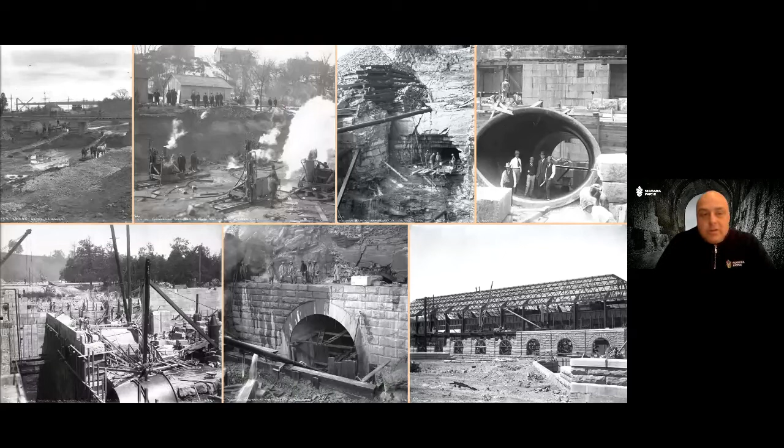So here's some amazing photos from the archives of when the power plant was built on the Canadian side. So you can see, working top left to right, where they're digging, getting ready to create the forebay, which would house all the water, the type of equipment that they used, steam powered, a lot of leverage, a lot of mechanical engineering. In the third photo, the steel structures, massive steel structures that were built. You can see the people standing in them and how large they are, and the construction and manufacturing behind it.

And then on the bottom 3 photos, you can see more of the build of the plant. The middle photo is actually the portal where the water would exit after it was used in the power plant. And to the right, you can see the facility that was created by basically steel and masonry efforts.

So a little bit about the chronology on the Canadian side. The doors opened in 1905. Power was generated by July of that year. So Canadian Niagara Power, when it began generating electricity from the Rankine station, it became the first hydroelectric generating station to be built on the Canadian side of the river and to transmit power for multiple miles.

So William Birch Rankine did pass away 3 days after the station opened. So unfortunately he never even got to see the power being created in the plant and transmitted the distances. But later on, they do rename the facility or put a plaque on the facility to give him tribute.

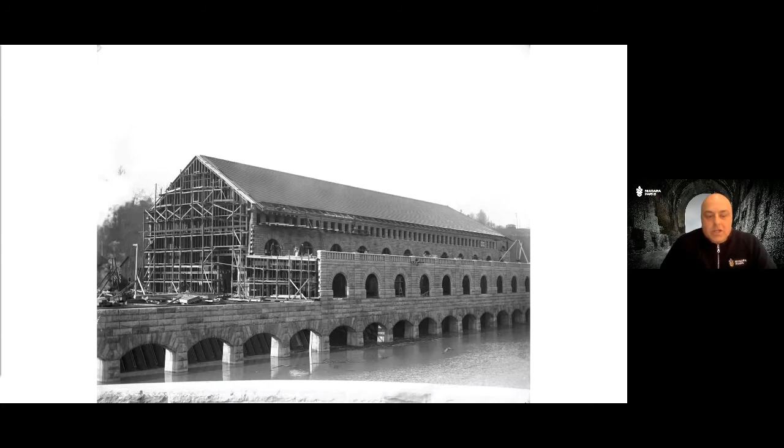So here's a photo, and the reason we put this photo up is I want you to look at the arches at the bottom of the photo. That is the beginning of the process as the water is directed into the facility. And you can see behind it some steel structures, which we call the trash racks.

So just a couple other key dates. It took until 1924 to get the 11th and final generator into the building. As I mentioned, in '27, the plaque is added to honor William B. Rankine. In '28, basically Canadian Niagara Power opens up in Fort Erie.

By 1950, Niagara Mohawk Power acquires the station. 2002, Fortis. Eventually, the facility shut down in '06. And in '09, Niagara Parks takes over and starts to put visioning exercises together to try to protect and preserve the plant and hopefully bring it to everyone who'd like to come see it as a brand new attraction.

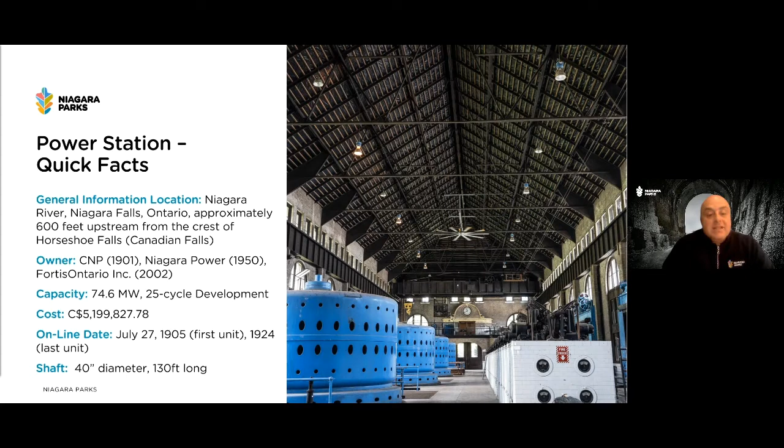At that time, it cost almost $5.2 million Canadian to build it. And an interesting fact about that, today that would be over $150 million, so you can see the present value of those dollars. The online date we talked about was July 27th, 1905, and by 1924, the last unit. And we'll start to go through a little bit of the equipment, so we'll go to the next slide.

You've got the penstock that we're going to show you and what it looks like, the power station, local limestone, glazed clay tile roof, very beautiful. It's 570 feet long, 2 floors. This wheel pit, I'm very excited to show you because it's one of the coolest experiences. It's at the very bottom of the plant. It's very long, the entire length of the plant, and it's about 20.5 feet wide.

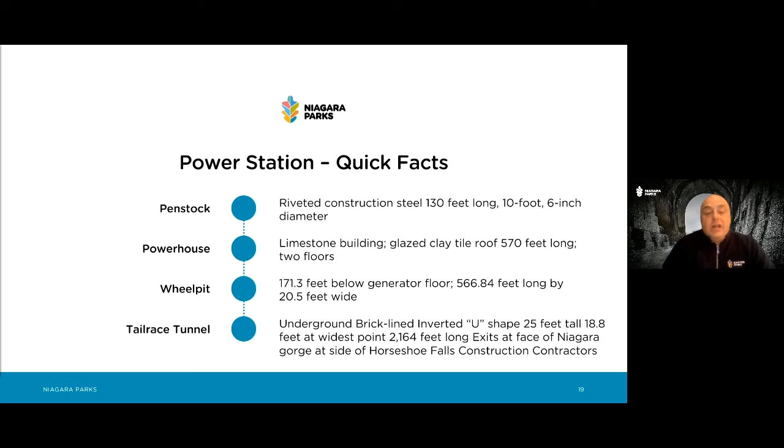And then of course that tunnel, where we'll show you that as the water came in, it headed back out the tail race tunnel and back to the river. So very green, very ingenious. We'll move on to the next slide.

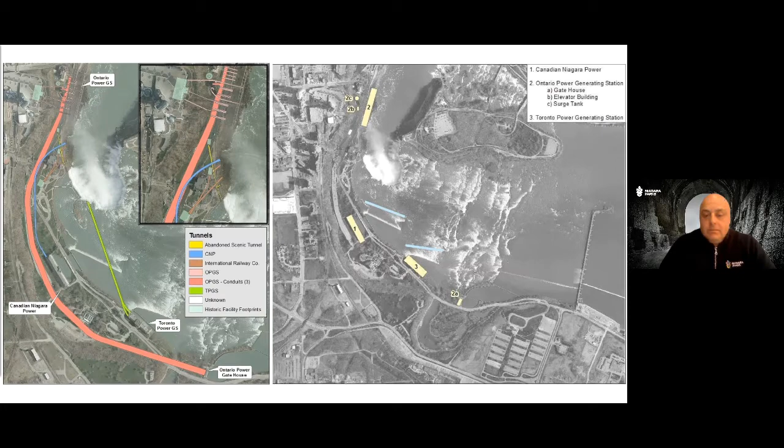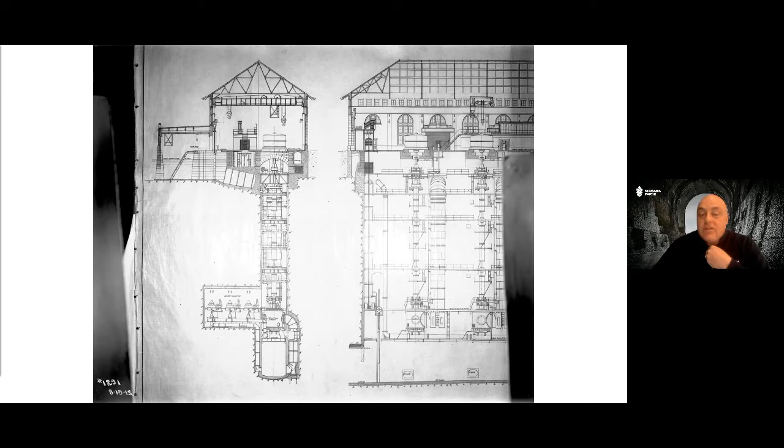You've seen this photo in the video, but here's a cross section of how the plant works. We're going to do a little video that gives a clear indication coming up. On this one, you can see the flow coming in through the forebay, through what we'll teach you about — the headgate, penstock — down the multiple layers to the turbine, and eventually down to the very bottom rectangular area known as the wheel pit. To the right, you can see the wheel pit leads to the tunnel I showed you, which leads back to the river.

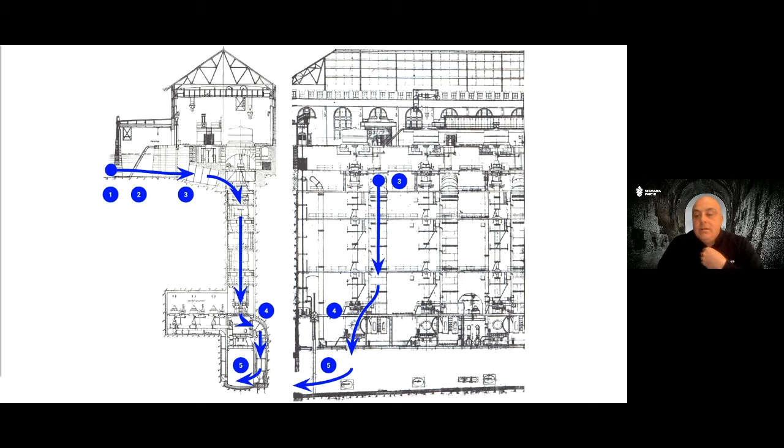Here's a quick little video to show you the function, and then I'll be able to show you the equipment and how it functions. Hopefully you'll be able to see this shortly, and if not, I can walk you through it.

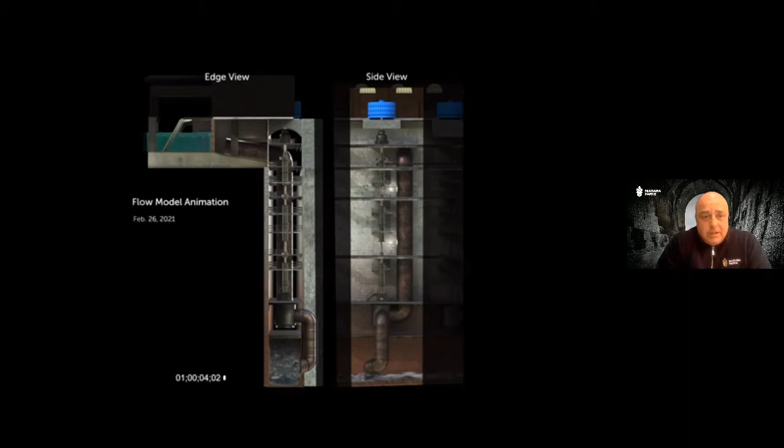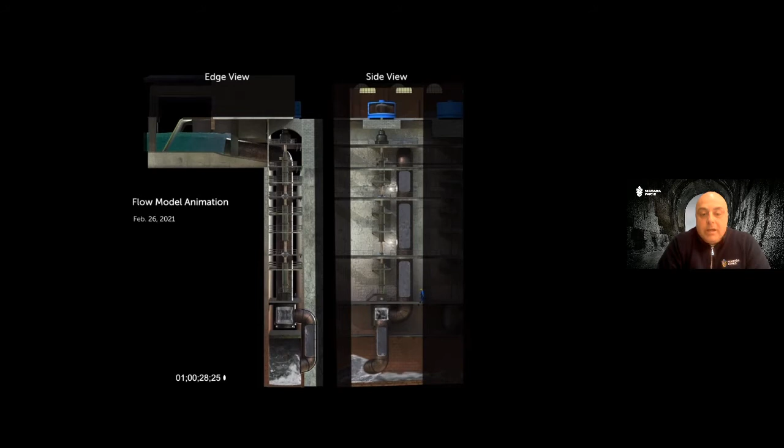You see the water on the top left, a little greenish in color, a lot of lime and calcium. You can see the gate coming up and the water starting to make its way through the trash racks into the penstock. As you go down the penstock, you'll start to see near the bottom the turbine begin to turn, then through the turbine into the wall and back out to the wheel pit, and from the wheel pit down this beautiful brick-lined tunnel. These floors are massive — you can see by the person on the right cross-section the comparison of an average person to how large this infrastructure is. So we're going to show you that.

At the very bottom, the turbine is connected to the shaft. The shaft goes up to the blue alternator — a lot of people call it a generator, but I will call it an alternator, which spins and creates the AC power.

So we'll move on and show you a little bit more around the equipment. I talked about a head gate. Once you come into the forebay with water, you make it through the trash racks, these massive steel structures that they figured out the engineering to lift up and down as required. We wanted you to have a visual of that. These are about 19 feet by 17 feet.

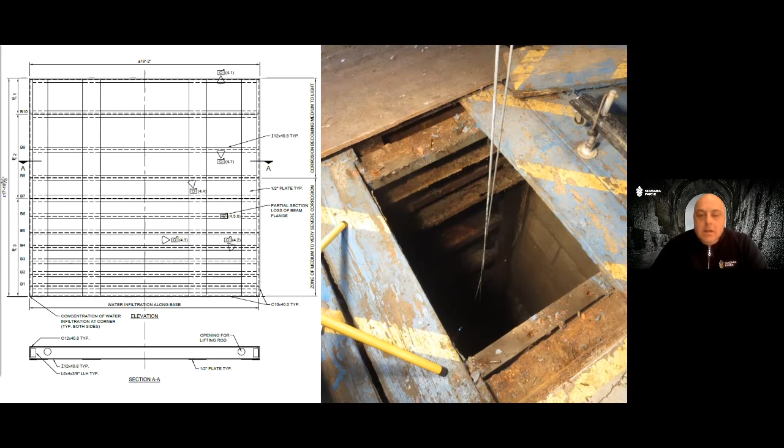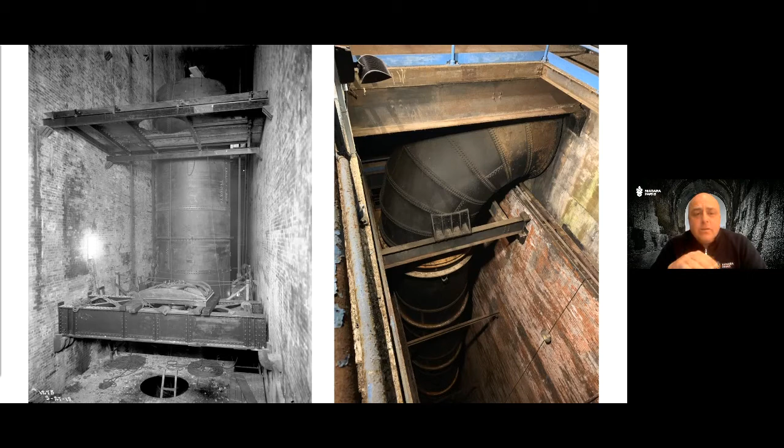After the water comes in, the first thing it hits on the right-hand side is the curved section of the penstock. These are 10 feet 6 inches in diameter, riveted steel structures. I don't know how they did it back then, but they figured it out. A massive structure that they pieced together like a puzzle, taking it all the way down 135 feet until it hits the turbine. On the left, you can see how they were putting it in section by section with limited equipment.

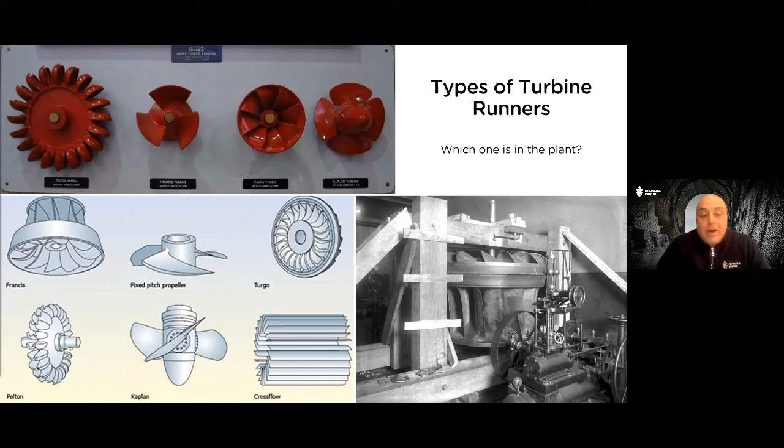Another interesting point is the selection of turbine. We know there are a lot of different kinds of turbine runners out there. To the right, you can see it cribbed up as it arrives at the plant to be installed, and you can compare that to the photos on the left. You can see they used a Francis turbine, named after the individual who invented it.

What's very interesting about the Francis turbine is it's got a double set of blades. It's even used today in hydropower plants. It's based on Newton's third law - any action gets a reaction - so it's a reaction turbine. The resulting motion, even though the water's coming in horizontally, ends up as an axial transfer of load, which is perpendicular, and then the water drops down, the shaft spins, and does what we showed you.

It's very efficient, anywhere between 90 and 95% efficient. The key is that it can stay at a constant speed as long as you can adjust the water, and we will show you how that is done in the plant. It's also ingenious in that you can keep the speed and direction, and it can be flipped - in this plant, it was just positioned in this fashion. So we wanted to explain that.

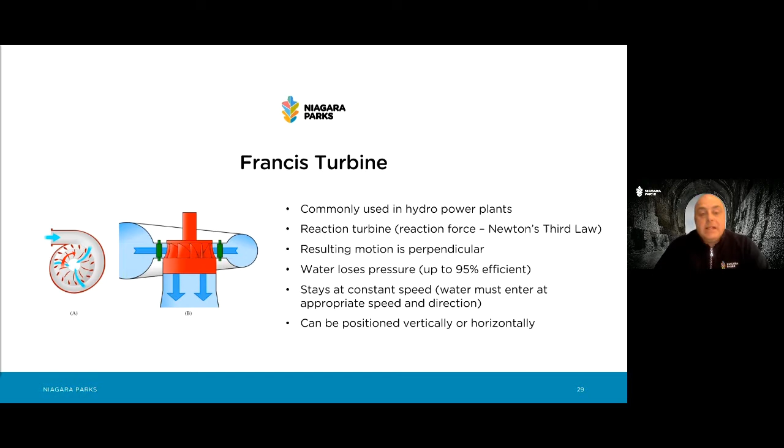This shows you that as they're putting in the turbines, the 11 of them, improvements are made and different companies are manufacturing it. Some names you'd recognize today, like Bethlehem Steel, Escher Wyss out of Switzerland, and Wellman Seaver Morgan. You can see the horsepower grows as they're tweaking their design, but what always remains constant, because they picked the Francis design of turbine, is that 250 RPM.

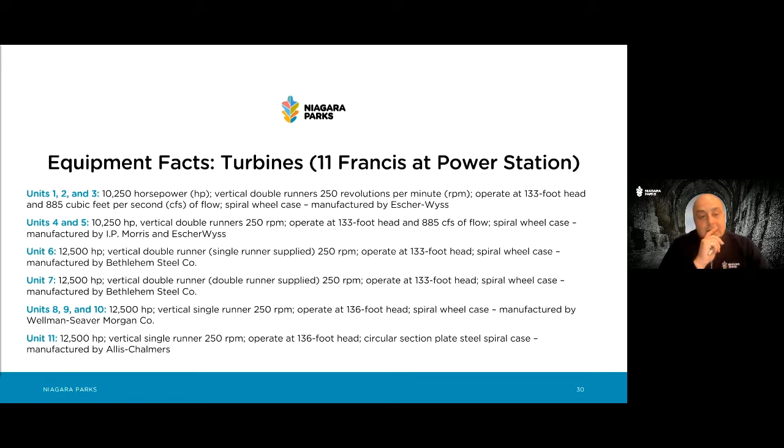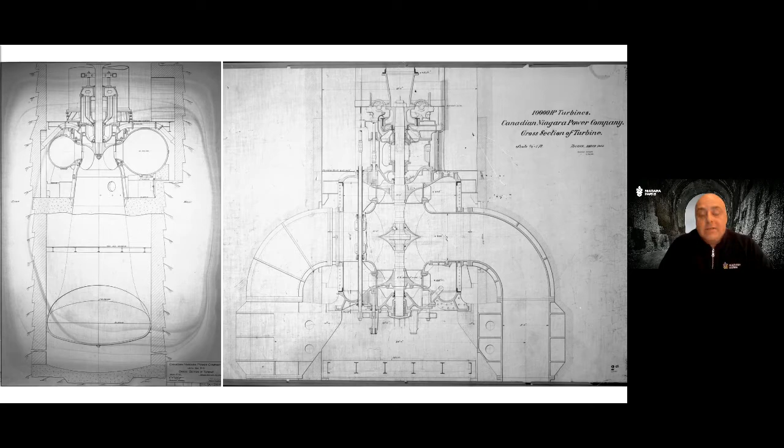Next, some really cool equipment that's down in the lower areas of the plant. This is basically a pump, a massive pump system, so that as the water came in, they were able to pump it through the entire plant for cooling purposes and to use it throughout the plant for many functions.

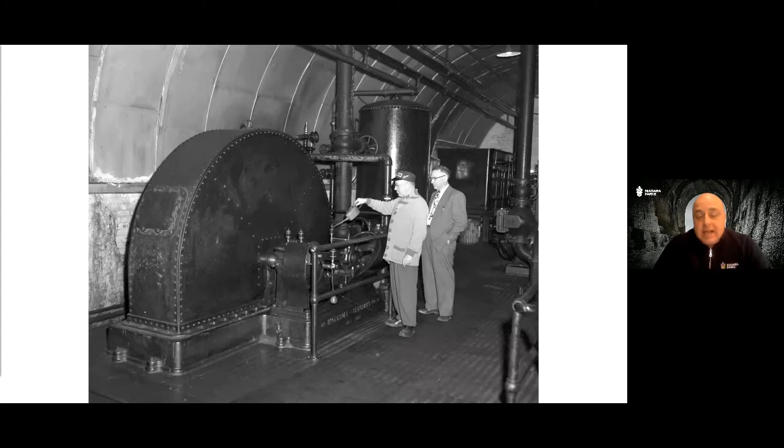Another cool piece of equipment on the next slide is an air compressor. I don't know if it's one of the first air compressors made, but again, always using water to turn these different devices or inventions, they were able to create compressed air and use it throughout the facility for different purposes. Some incredible equipment.

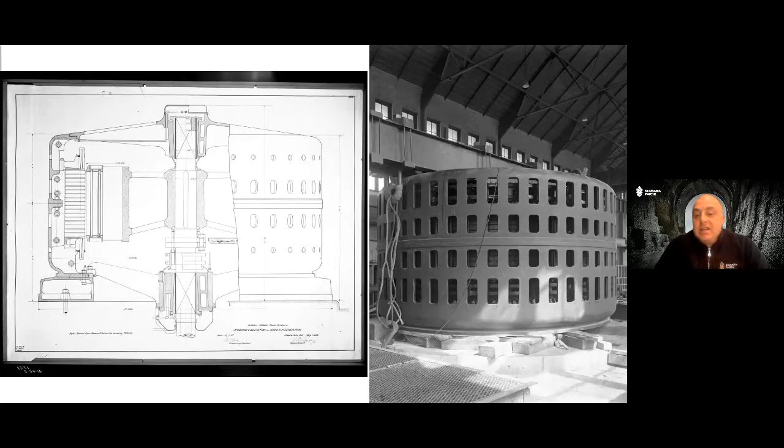Just wanted to give you a visual of the alternators that are still in the plant and a cross section so you could see the rotor, just the basic principles of a motor, and we'll really get into how these create the AC power and Tesla's ingenious invention.

I just threw this up for people that are interested, but they had already made a decision on the Francis turbine, and the fact that it's already a set size and diameter and speed, and they had a fixed head, the difference between where the water comes in and when the water hits that turbine, meant they were really kind of stuck with going ahead with 25 hertz power.

You can see as it lines up, at 25 hertz you're at 250 RPMs. If you scroll to the left, that means they had to put 12 poles inside the alternator, so they were kind of stuck. The decision had already been made in the Dean Adams plant, they already selected the turbine, it was on order. That fixed them into continuing with 25 hertz and not switching to something like 60 hertz, which later on in the plant was a bit of its demise. The conversion to 60 hertz would have cost too much, and there were other issues as well.

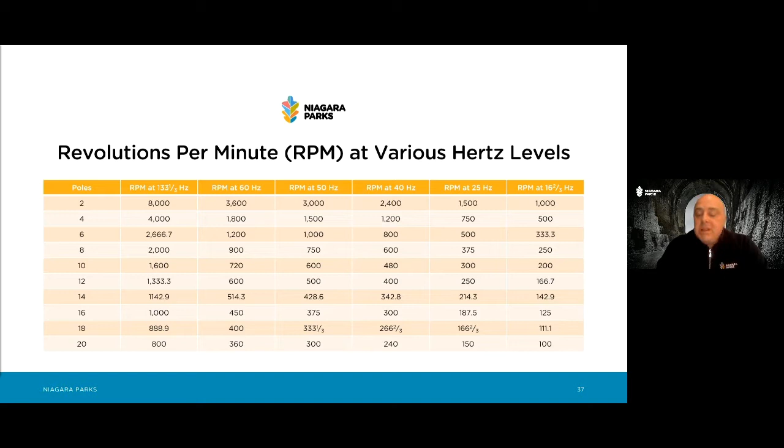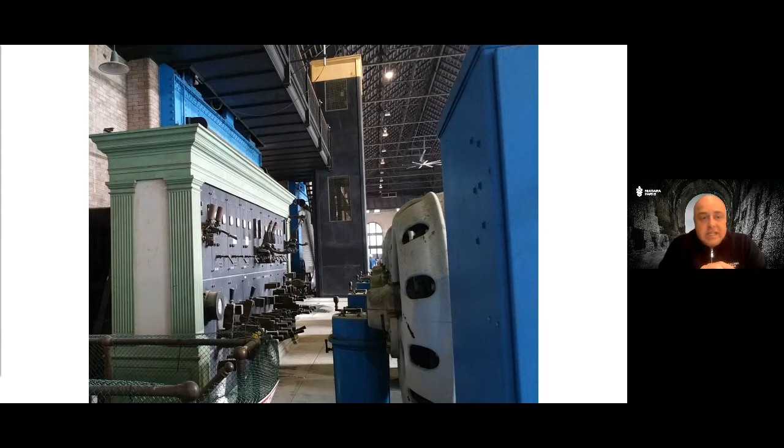Okay, so this is an important part where we learn about the DC. There's a little bit of Edison in the plant because he came up with DC. This panel is a DC panel, and on your right I'm going to show you the exciter, which also generates DC. These switches powered up a DC elevator, the lights were DC, and several other things in the plant were DC. So we have a wonderful combination of DC power and AC power in the facility.

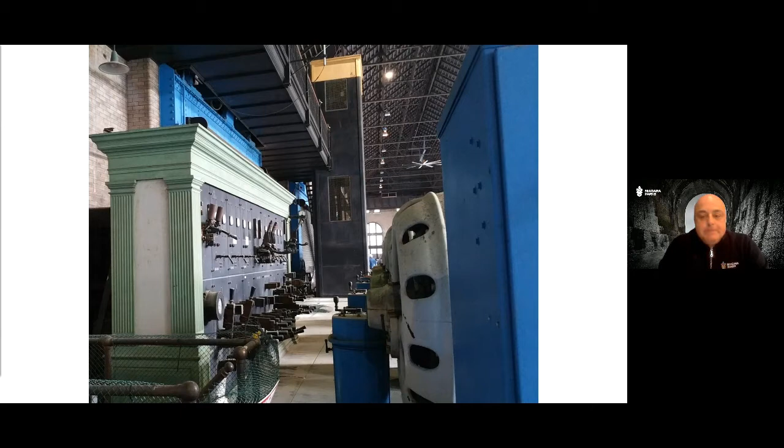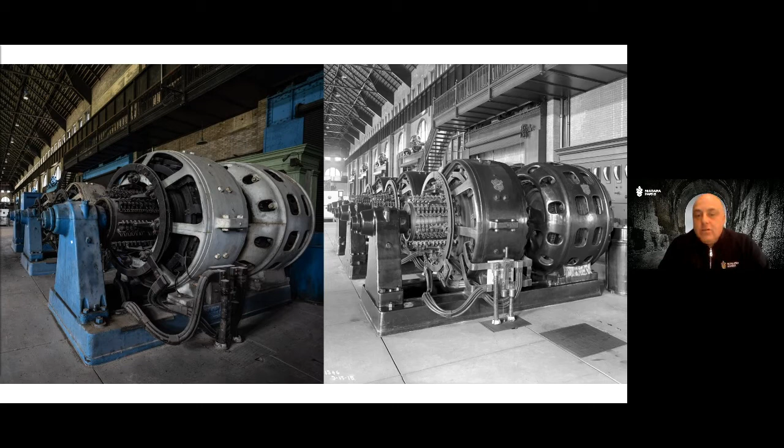So this is what I call an exciter. I've been corrected many times by people who know a lot more than I do, and they call it something a little different. But what I can explain is, if you look at the right when it was initially installed, you see two chambers or housings. The right is the motor, and the left is the generator. You needed the motor to start spinning, which at one point in time was done with water. So now you're turning an AC motor by Tesla, and then you're creating the generator. The generator is creating DC power.

The DC power goes into the alternator and creates the magnetism inside this alternator. So once you create the magnetism, now you have the complete package that Tesla came up with for generating AC power. The rotor spinning, the DC power is turned on through those exciters, and basically now you have the windings for the three AC lines to go through.

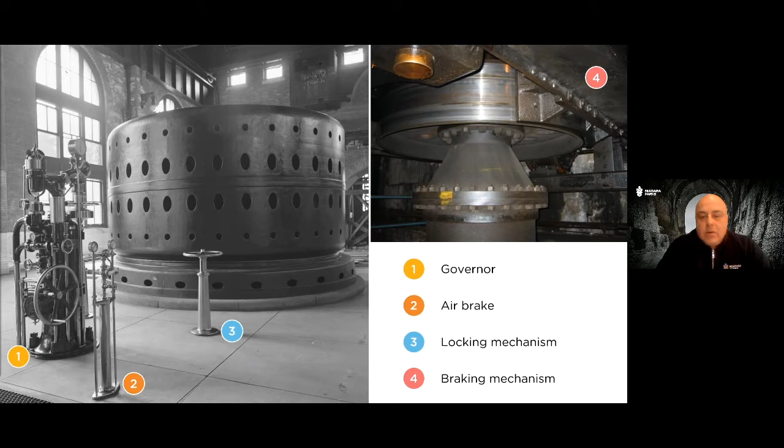So some really cool pieces of equipment. That governor is unbelievable to see in real life and understand how it functions.

They would watch the reactive VARs so they could know if it was lagging or leading the power. They could see the megawatts being produced by each generator as they turned on each one. And then they had to watch the current and the voltage because everything has to be in sync. And I'll explain that a little bit more.

So just a quick explanation of how that works, and maybe it's overly simplified, but this is how I think about it in my brain: when you're skipping and you've got two ropes going, those almost are creating the waves. We used to call it double dutch. I don't know what it's called today, but you're skipping. You have to be able to jump in at the perfect time. If you jump in at the wrong time, you hit the rope, it's done.

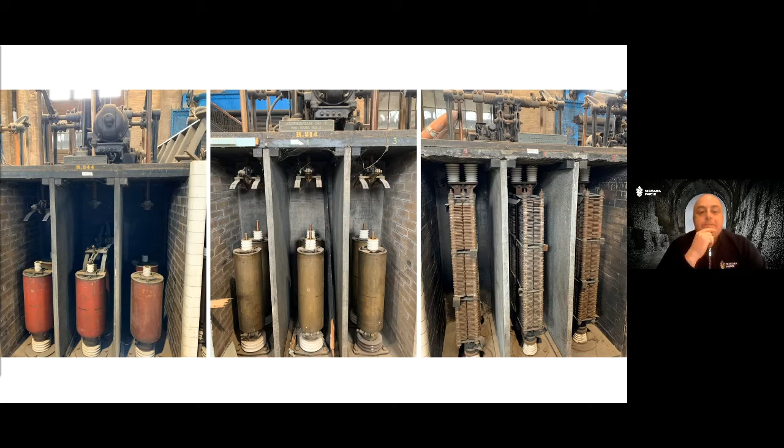So an interesting breaker setup between the operator on the second floor and the operator in the main control room that I showed you. They have to talk. They have to hit the switch. When the synchrometer hits 12, that tells them that's the right time. They're not going to blow anything up. Then these crack down, make the connection, and then we'll show you the synchrometer in the next slide. We'll flip to the next slide.

So once you close the switch in the middle, or your breaker, it has to flow. You can see the big copper bar right underneath. And to the left, those copper bars are in each of those phases. They're labeled phase 1, 2, and 3. That's called the bus bar.

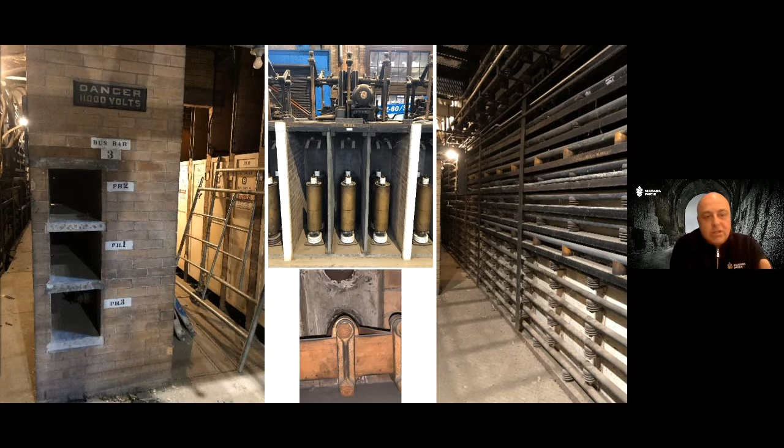So that takes that load, that electricity that's coming out of that alternator, the big blue machine, the breaker's closed, it flows through the copper cables, through each of those phases going through a long copper bar, and eventually to the right, go through the cables, and then the cables will take it out to where the power needs to go. So an understanding of the process. If we go to the next slide,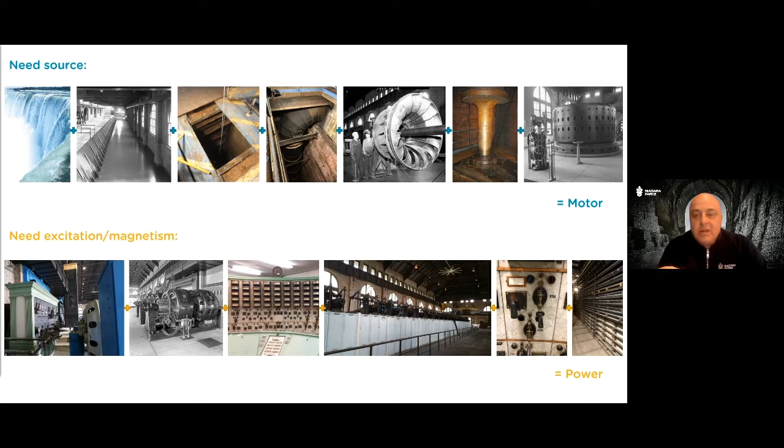In photo number 4, it drops 135 feet and spins the turbine, the Francis turbines. They're 130 feet down. Even though the water's coming in horizontal, it now turns the shaft perpendicular, which you see all the way back up, and is connected to that alternator, with that governor giving you the ability to get the speed and the amount of water just right to get it to 250 RPM. So now you flip to the excitation, because that's only a motor, basically. If you don't have magnetism, you just got a motor, you're not really going to generate AC current.

So when you come to the bottom, you've got this DC control panel, you've got the exciter that we talked about that spins the AC motor, goes over to the generator, generates the DC power, which feeds the big blue machine. You're in the control room, you're watching the synchroscope. When it strikes just before 12, somebody's talking to the operator on the second floor. You close the breaker. You've got the electrical panel. The way you close it is one of those switches, one of those knobs. And as I showed you, the power eventually goes out the cables.

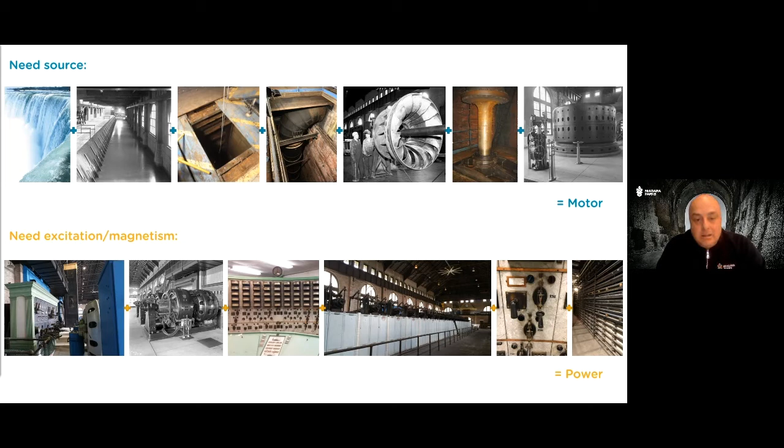And basically the last slide, you've got power for the lights in Fort Erie. So just an amazing process with amazing people. Tesla at the helm in terms of all his patents, 9 out of the 13 that actually make this plant work. And the beauty of it is we have it all in the plant that you can see, you can touch, you can understand. It's incredible for me as an engineer to be part of it, and hopefully it'll be incredible for you to come see it and experience it yourself as well.

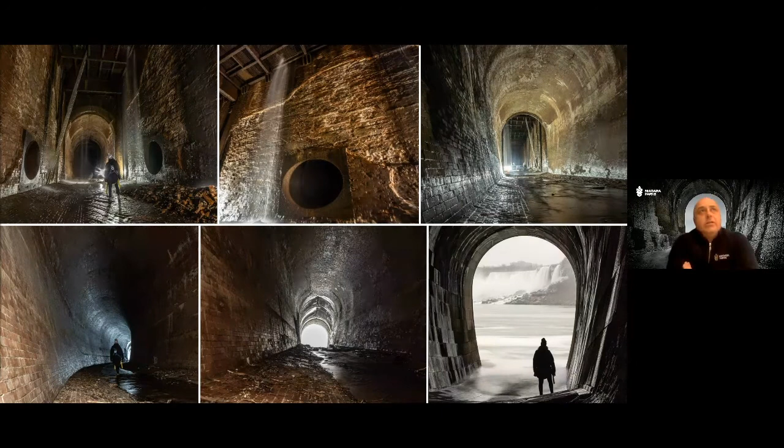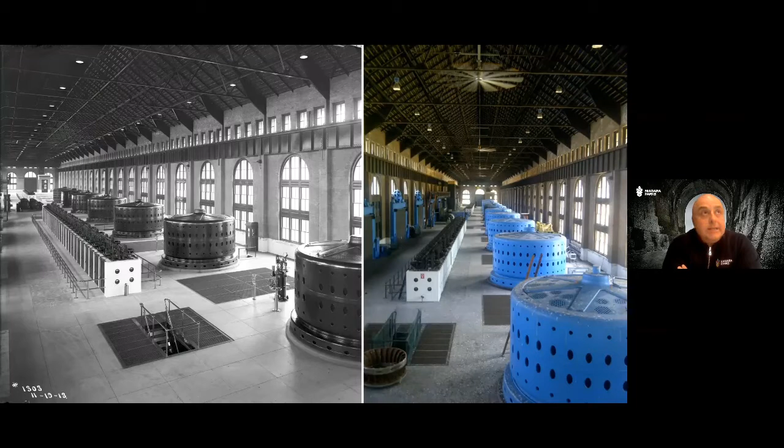So the tunnel is basically when the whole process is done, the water drops into the wheel pit, this big rectangular chamber, and then starts to head out 2,200 feet and make its way back and drop right into the river. Right by what you're looking at on the bottom right is the Horseshoe Falls, or the Canadian Falls. So you can't ask for greener than that. We borrow the water, we put it back, and power to everybody's home. And there's just a beautiful visual of the plant 115 or more years ago and the plant today.

I'm going to turn it back to my colleague Kim and let her take you through the reimagined power. Yeah, thank you, Marcelo. So what we'll do is we'll take you from the science and technology of hydrogeneration to how we're bringing this old plant to life. So we're taking it out of hibernation and we're bringing it to life with both daytime and nighttime experiences. We'll go to the next slide.

So we're going to see whether this video will play or not. If it does play, this will just give you a brief overview of the project that we're now working on. Oh, looks like we're going to have to leave that one for now.

So in terms of the phasing of this new attraction, we will be launching July 1st, 2021 with both the generator floor tour and our immersive multimedia show, which is our nighttime experience. 1 year later, we will then be producing the tail race tunnel experience. And then for future opportunities, we hope to create some linkages to our Journey Behind the Falls and to other infrastructure in our area.

So in terms of the plant itself, it is full of these beautiful details, these beautiful materials. There is copper everywhere, there's texture everywhere. So we will be using these as sort of a reference point and inspiration for all of the work we're doing.

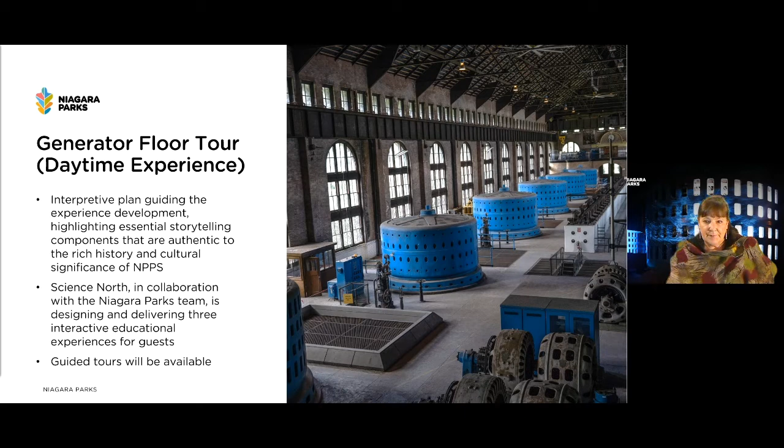So in terms of the key interpretive plans, really at the heart of this storytelling is harnessing the true power of the falls. So why was this plant put where it is? You know, it matters because it is beside Niagara Falls itself, that's what matters. That's why they put it there. So we want to share that sort of sense of place, of history and geography. And then the plant itself, the beautiful architecture and construction.

And then in terms of power, this is where we get into science, technology, and innovation. So we want to pay reference to the science and technology it took to build this plant, and certainly Tesla's inventions. But also we want to look to the future. So where is power going? Where is sustainable power going? Where is green power going? We really want this to be a living building that can celebrate and bring all of these new ideas to life.

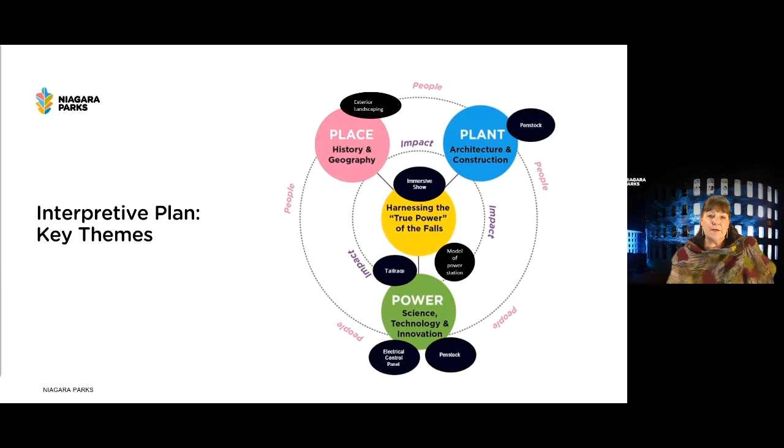So in terms of the development of the interpretive plan, as you can see, we've created zones within the plant. So all of the interpretive work will take place in the generating hall itself. And you can see the variety of stories that we will be telling throughout the plant. And then the forebay area, Marcelo and his team have been working very, very hard. So much of the forebay area is actually being concreted in to create retail and culinary space, but we are leaving a section of the water in the forebay area open just so guests can understand how the water came in from the river into the plant and then through the penstocks.

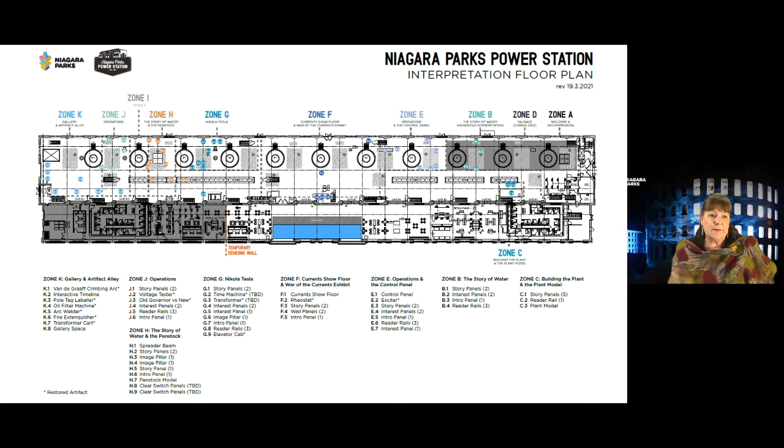So in terms of collaboration with Science North, many of you know their work in terms of the Science North Museum up in the Sudbury area, but they also do work right around the world. So we've been very happy to work with them. So the first of the projects we're working on is called Follow the Flow, and this is actually a scale model of the plant itself. So this model will be about 22 feet long and about 12 feet tall. And really a couple of things that we're trying to show with this model.

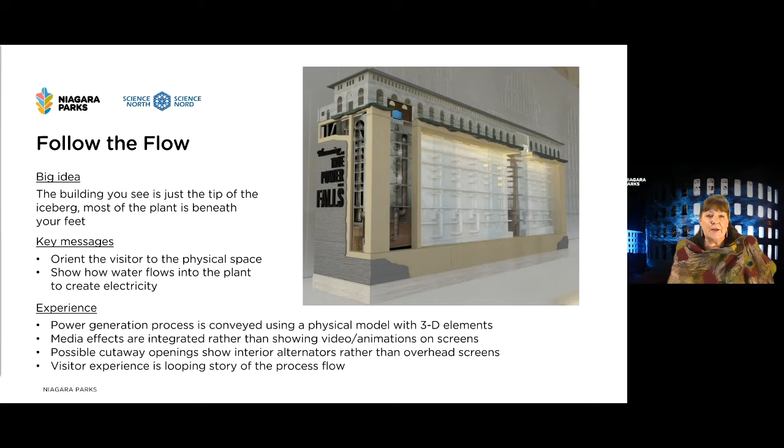So first, it's almost like this plant is like an iceberg. So even though the building you're standing in seems quite immense, as you look at the model, you realize that so much of it lies below grade, that really the smallest part of the building sits above grade. And also that animation that Marcelo shared earlier, that animation will be visible as these huge animated graphics on the end and the side of this plant, along with interpretive panels to help explain all of that science and technology that Marcelo just took us through.

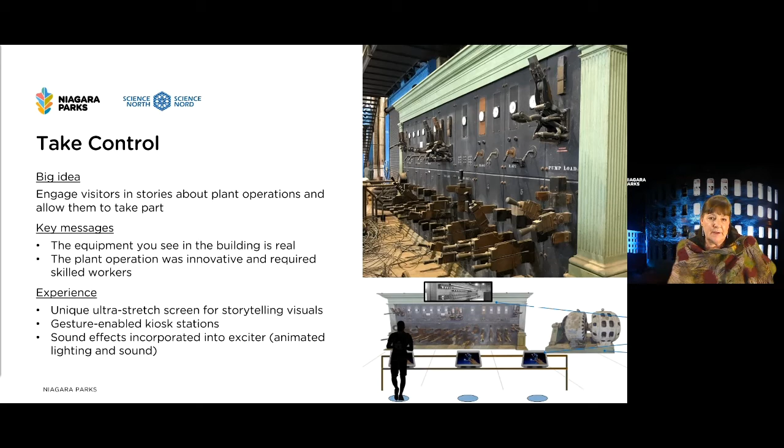So the second of the Science North models is we're going to actually bring to life this old control panel. It's such a marvelous artifact that's been left to us. So we'll go to the next slide and I'll explain what we're doing. So it's actually a bit of gamification. So this is going to be a lot of fun.

So there'll be a large screen mounted on top of the control panel, and we will have 3 or 4 scenarios built where guests will be invited to come up to activated screens on a rail in front of the control panel. And essentially a scenario will be set out for you.

So there may be an emergency where, as Marcelo said, maybe a log or a big tree came off in a storm and it's starting to block the trash rack, and maybe part of it got into the penstock itself. So the guests will be invited to sort of become part of that storytelling, be part of the solution, and through the tablets, they'll be instructed to do various things to help solve the problem.

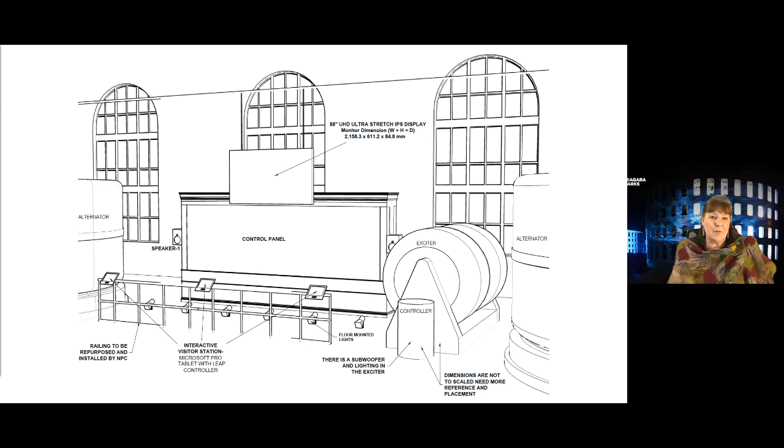This will lead you over to a glassed floor area where you'll be able to look down and get a sense of that huge drop that these penstocks took down to the wheel pit area, and that's what turned the turbines.

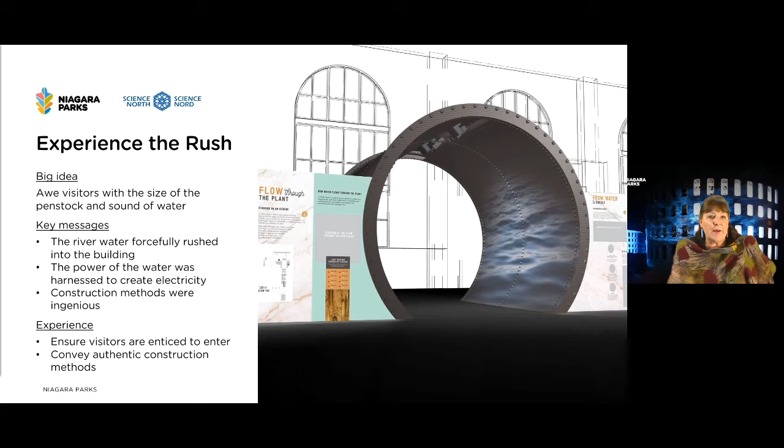So also we're creating an interactive guide, which you can use on your own handheld device. Through these guides, we will have scanning markers throughout the plant, and this will allow you to get deeper information on a variety of the topics that we'll be touching on in all the immersive displays. Also, it'll be an audio guide, so you can either bring your own earbuds, or we'll have earbuds for sale. And this will also allow us to provide some of this guided information in multiple languages.

So in terms of the night experience, this is where things get really, really exciting. So we're working with Thinkwell out of Montreal. And Thinkwell are well known for their beautiful, spectacular shows they create all around the world. So we'll be using both the laser lights and a variety of effects, including projection mapping and reactive technologies, to create an amazing, wonderful spectacle of a show at night.

So the show itself is called Currents: Niagara's Power Transformed. And I'll take you through a little bit of our thought process that we've been working on in terms of the creative. We're going to see whether or not this video will play for us. It's a bit of an overview from our partners with Thinkwell out of Montreal.

So this project here is very special. We're in a very old building that has been sleeping for about a decade, a bit more. And before, it was breathing, it was living. It was a really kind of living thing, and that's exactly what we try to reach here. It's like to take this building and to bring back life. My name is Antoine Roy-Larouche. I'm a producer at Thinkwell Studio Montreal. So this immersive experience in the night will take the guest at the very center, at the core of the building, and by their presence, they're going to wake up the building, and to make it breathe again. For people to understand what an immersive experience is, it's almost like

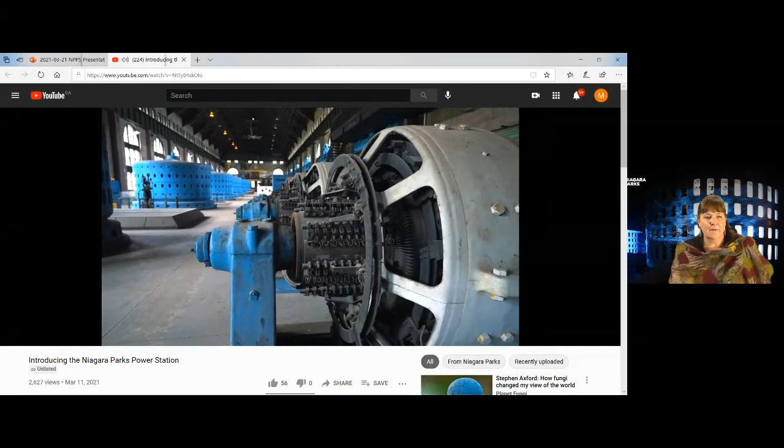Niagara Parks is at the heart of Canada's premier leisure tourism destination, and we are very proud to be opening the next new attraction, not only for Niagara Parks but also for Niagara. This will be a catalyst to drive new demand generation to Niagara and to Ontario, starting in July of 2021.

Okay, I'm back. I'm just glad we were able to show you that video, because I think that was important to give you a real view of what's happening. I'm just going to give you a couple quick project updates from a construction perspective.

What we've done in the forebay itself is basically created a brand new wall to hold back the water. From the road, from a heritage perspective, people won't even be able to tell. The arches will still be visible, and water will still be entering into about a 100-foot section with trash racks, so we can show exactly how the plant functioned.

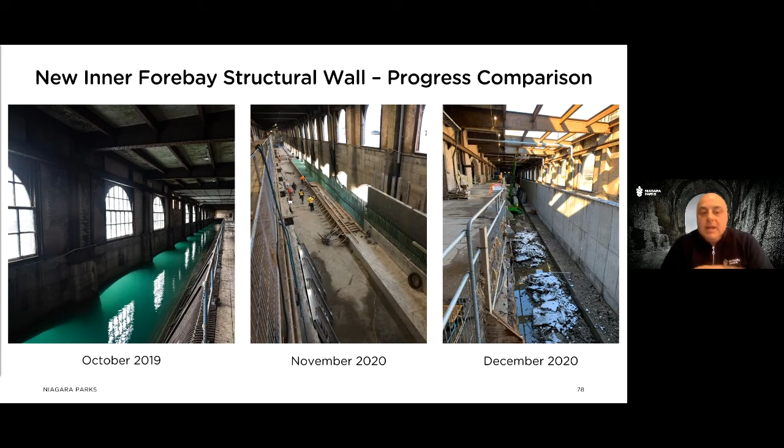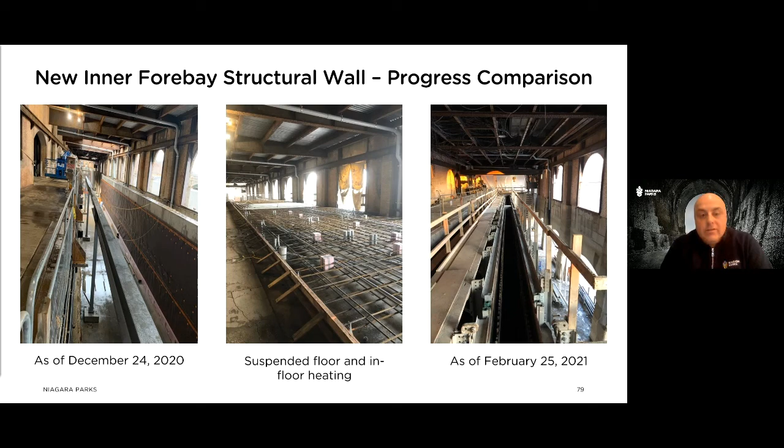This becomes the area—our basement, basically—for all our electrical, our sewer, everything, so that we do not change anything inside the plant. We protect everything. You can see we're working our way to actually pouring the floors in the forebay; that's what these pictures show, and we're actually just about done as of Friday.

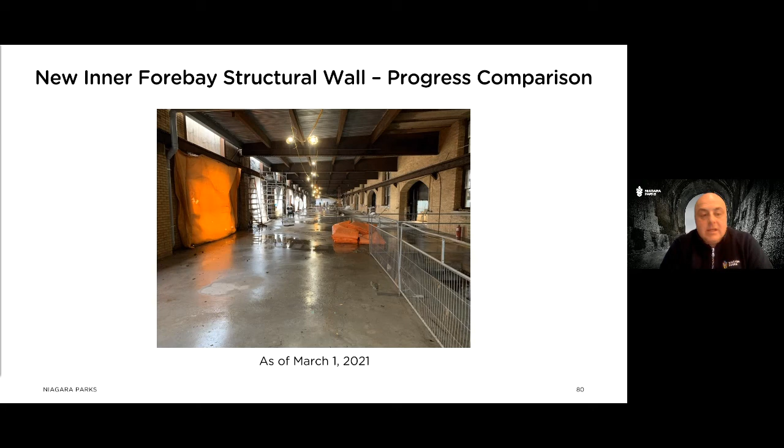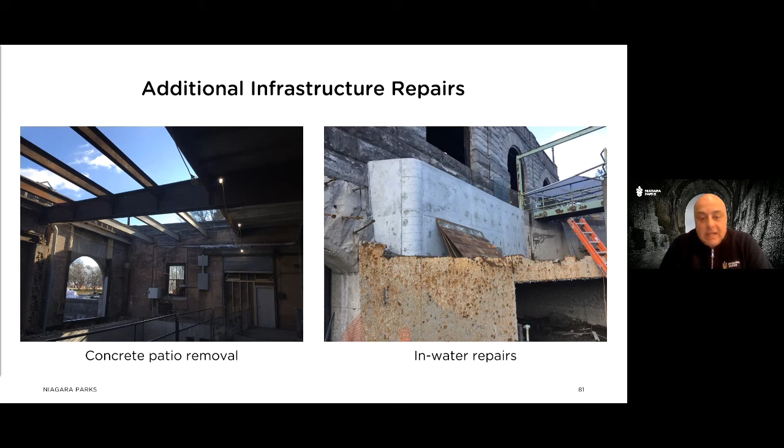And then out in the area that we dewatered, being over 115 years old, once we pulled the water out, we had to do a lot of different concrete repairs. That just gives you a feel.

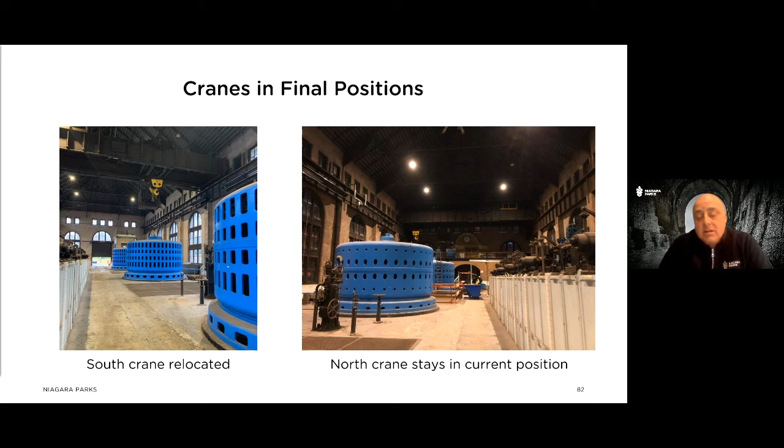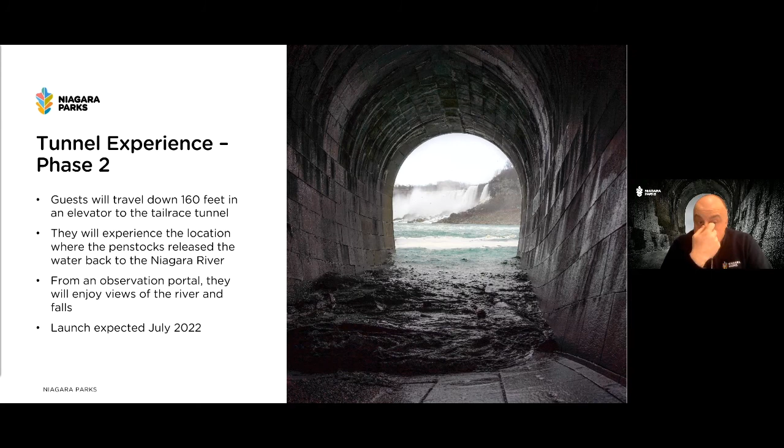And just the tunnel experience that Kim described - the guests will travel all the way down, and this is the incredible view at the very end. They'll come down 2 elevator cabins being built and installed with a brand new shaft. It'll take you right down to the wheel pit, where you can explore a bit - it's an incredible space. Then you can start your walk. It's going to be accessible, lit, and you'll come to the end where you've got this million-dollar view. That's expected for 2022.

And that's it. I see some questions are coming through, so I'm going to try and answer those directly over the next few minutes, or I could do them on the air if Dan, you're still there. So I'm going to have a quick look here.

So there was the Cataract Power Building in Hamilton - how is it related to Tesla's work? Very much the same as the plant in the US and the plant we have here in Canada. Hamilton did receive power but from DeCew Falls, and it did use the same patents. The patents don't change. The technology was all around the same time, and it was Tesla - and I failed to mention, but Westinghouse was the brains behind building the equipment and bringing it to life.

So that incredible combination. How often would turbines have to be replaced? I didn't work in the facility, but the feedback I get from individuals that did and maintained it was they tried to keep them running as long as they could. They often had to bring them up for big repairs. They had their own tool shop - if they could weld a broken or damaged blade, they had the skills to do that. But they did replace - from a gentleman I spoke to who was there 37 years - he said they replaced probably about 8 of the turbine runners over his time. So not a bad situation, I would say.